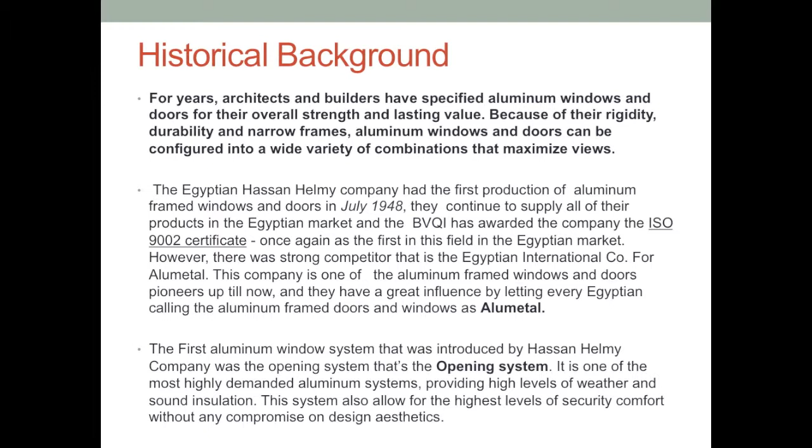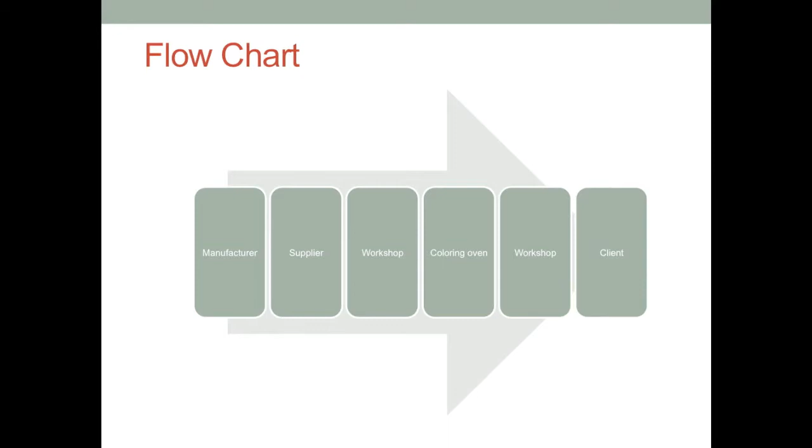Variety of aluminum doors and windows. Hinged and sliding windows or doors. According to the function, dimensions, and space availability, the choice of having a hinged or sliding door or window is based. There are different types of aluminum bars that form the frames that compose the doors and the windows.

In general, the thickness of cross-section affects only the weight and strength and consequently the price. As the thickness increases, the frame is heavier, stronger, and more expensive. However, all different cross-sections can be used in different purposes, residential or office work.

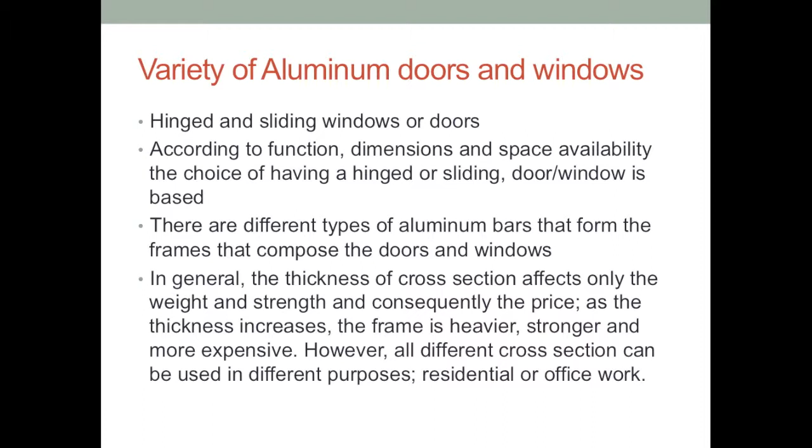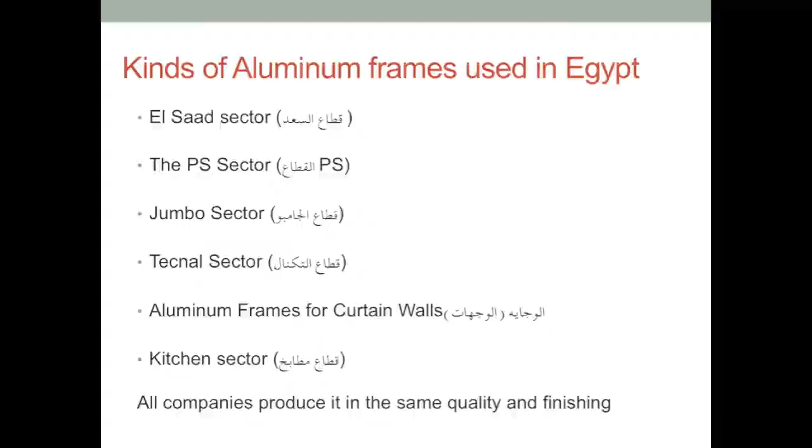Kinds of aluminum frames used in Egypt. El-Saad sector, the PS sector, Jumbo sector, Tecnal sector, aluminum frames for curtain walls, and kitchen sector. All companies produce it in the same quality and finishing. Here's a table that shows the comparison of the different types.

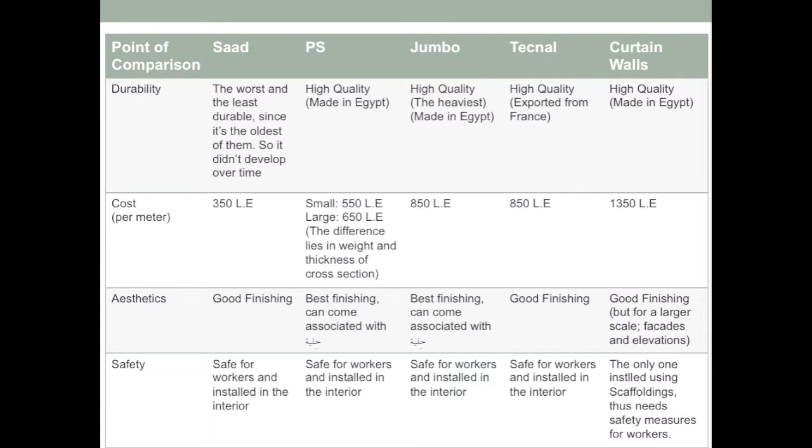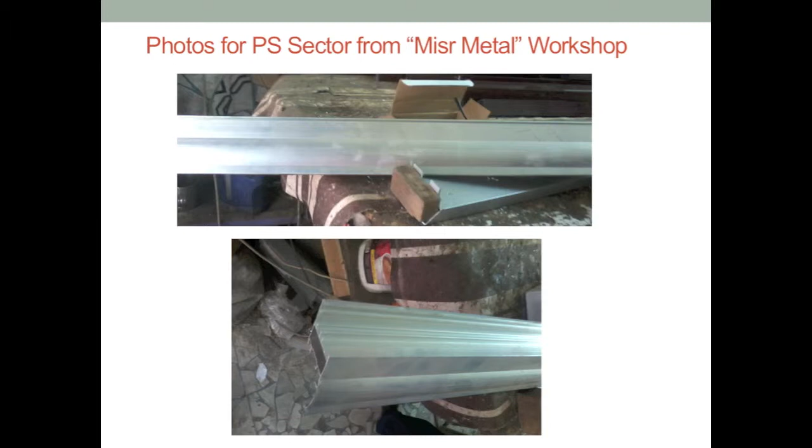Photos for PS sector from Misr Metal Workshop. Photos for PS sector from Farid Workshop in Saqr Qoreish. Photos from Misr Metal Workshop in Dar El-Salam.

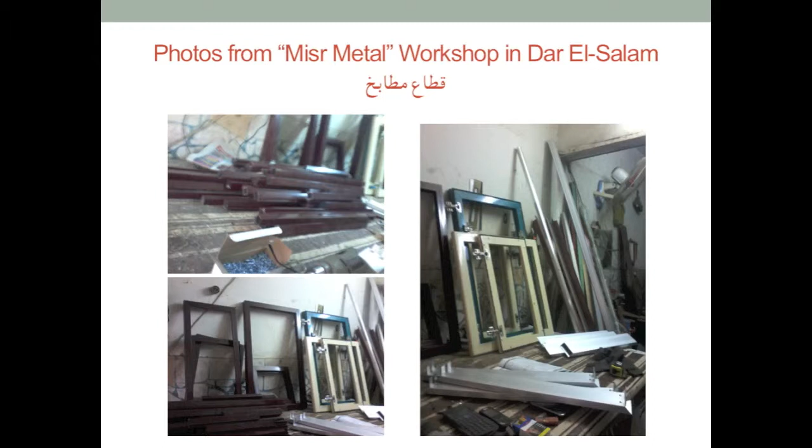The workshop stage. The workshop orders 6 to 6.5 meter bars of the cross-section they need from the supplier. They receive the aluminum silver in color and they send it to an oven to color it to the client's desires.

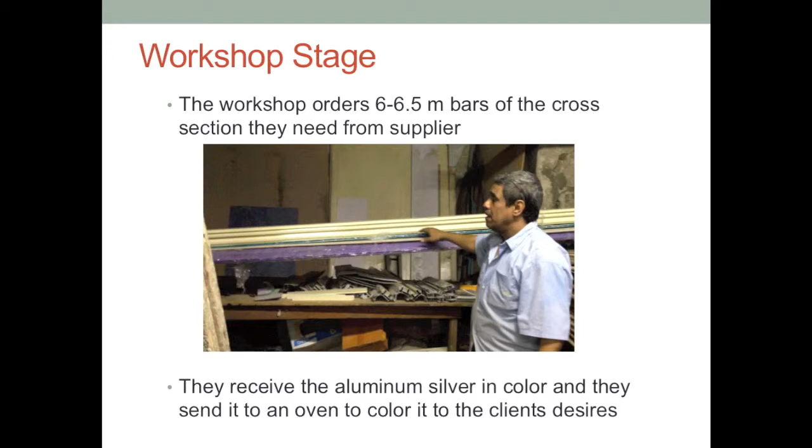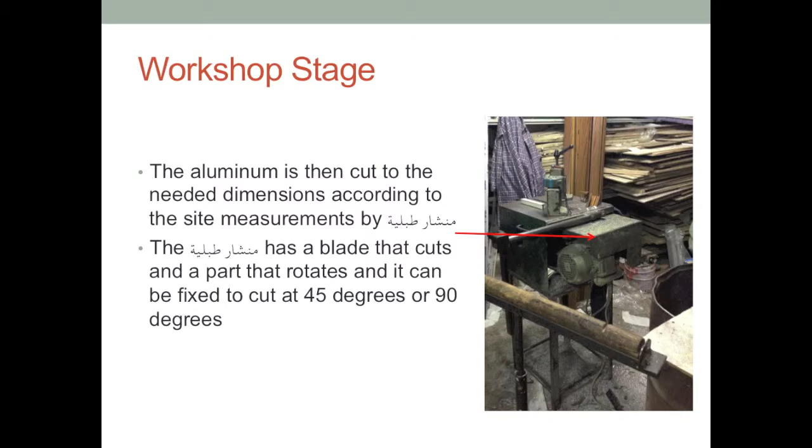The aluminum is then cut to the needed dimensions according to the site measurements by the Munshar Tableya. The Munshar Tableya has a blade that cuts and a part that rotates, and it can be fixed to cut a 45-degree angle or 90-degree angle. Here's a video that shows 45 and 90 degrees cuts by the Munshar Tableya.

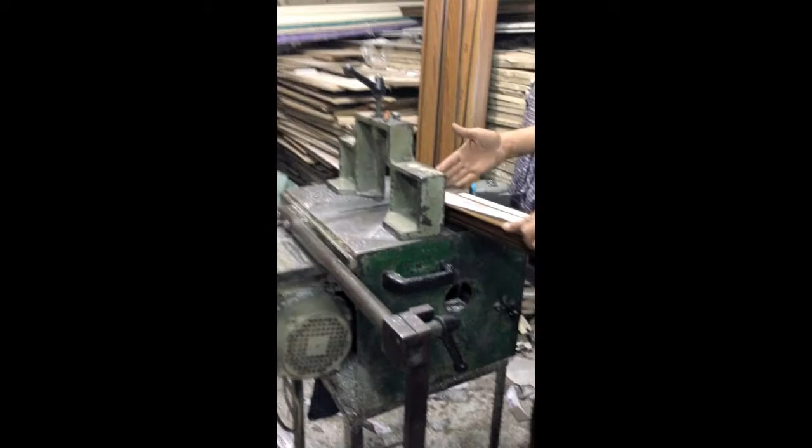Here's a video showing the cutting process.

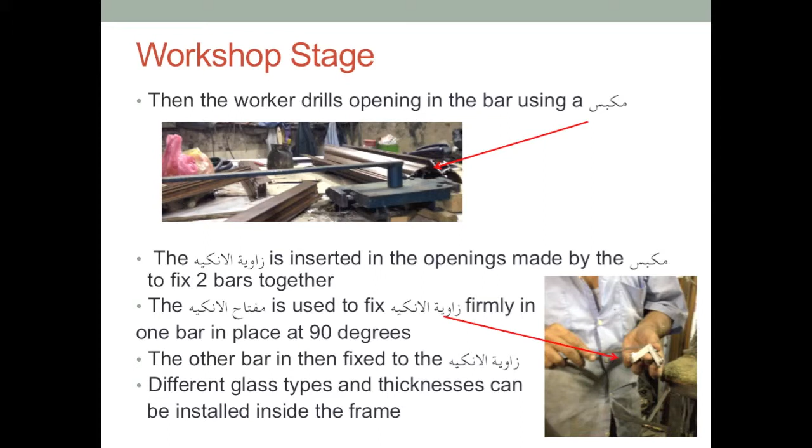Different glass types and thicknesses can be installed inside the frame. Here's a video showing the process of fixing two bars together using zawiya alanke.

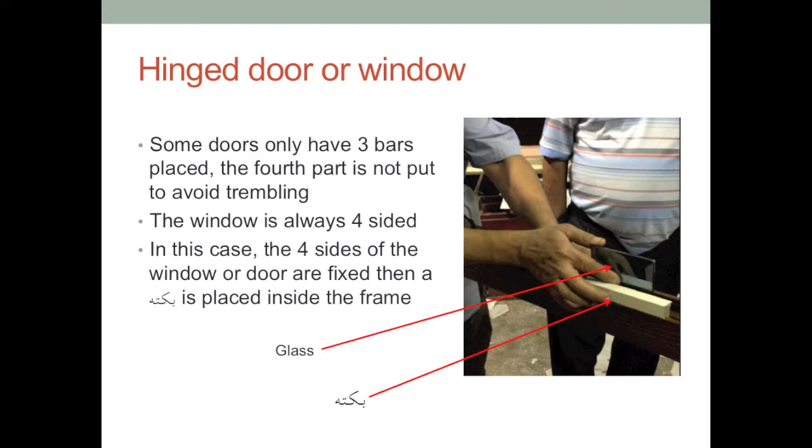An anti-dust and sound band is placed inside the frame. Then the glass is put inside and a rubber band is used to fix it in place. A zawiyat al-sag is placed in the 4 corners of the window or door to hold every 2 bars together and to prevent them from moving apart and strengthening the frame.

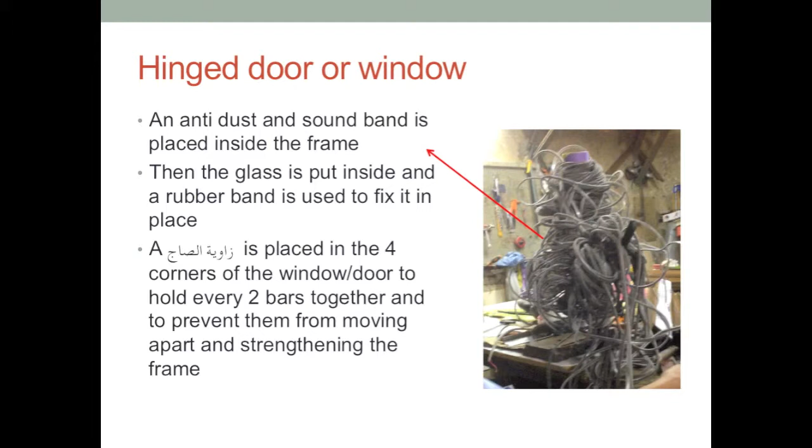Sliding door or window. The initial process is the same as the hinged. When making the frame, only 3 are fixed, creating a U shape. Then the glass is placed inside and the 4th bar is then put. An anti-dust and sound band is inserted. The glass is fixed using a rubber band.

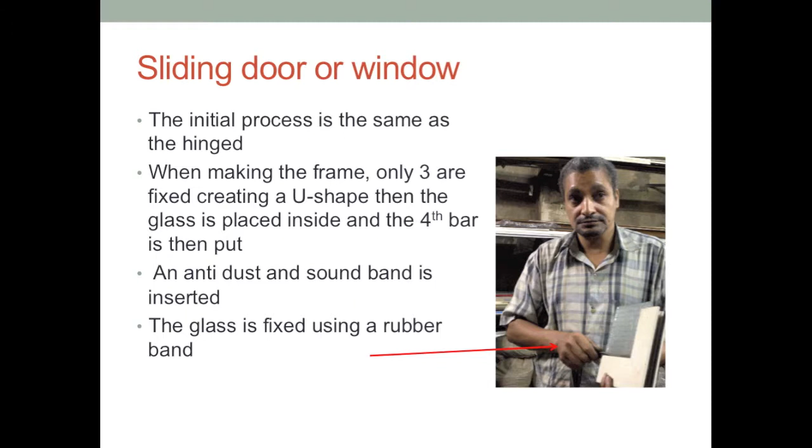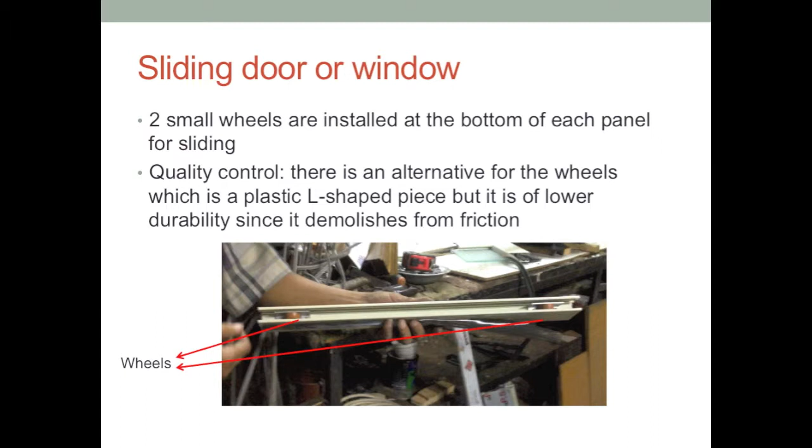2 small wheels are installed at the bottom of each panel for sliding. Quality control: there is an alternative for the wheels, which is a plastic L-shaped piece, but it is of lower durability since it demolishes from friction. This is a video showing the wheel installation.

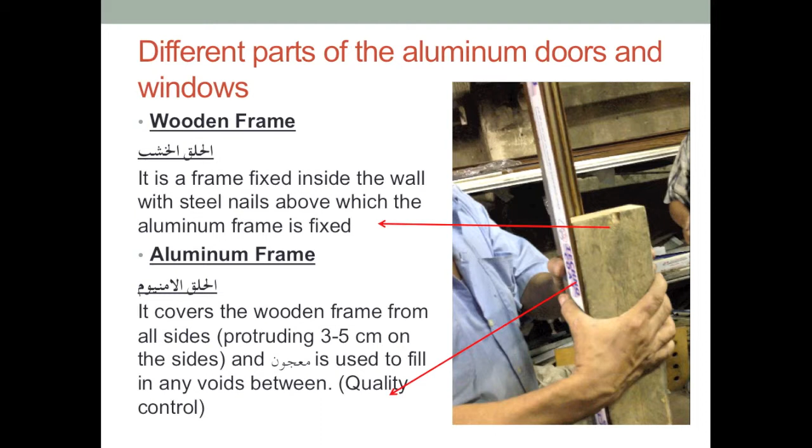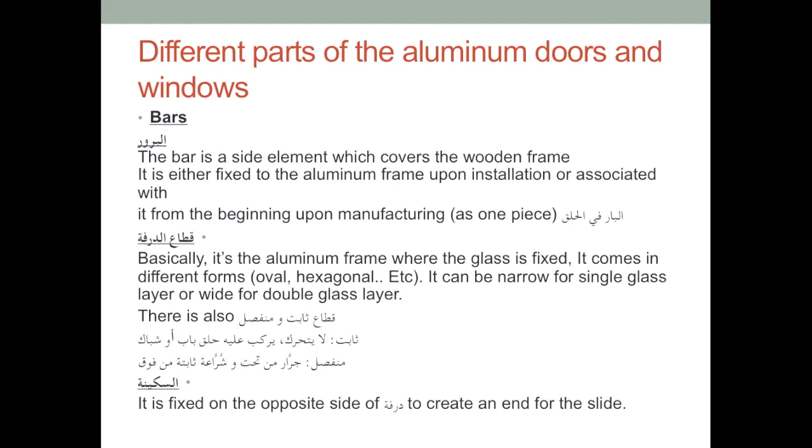السكينة: it is fixed on the opposite side of the درفة to create an end for the slide. Pictures from catalogs of الشركة الدولية showing aluminum frames and bars of different dimensions and cross sections.

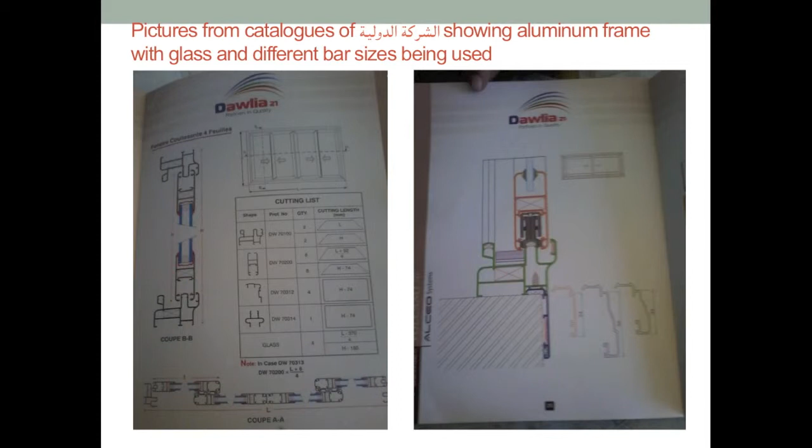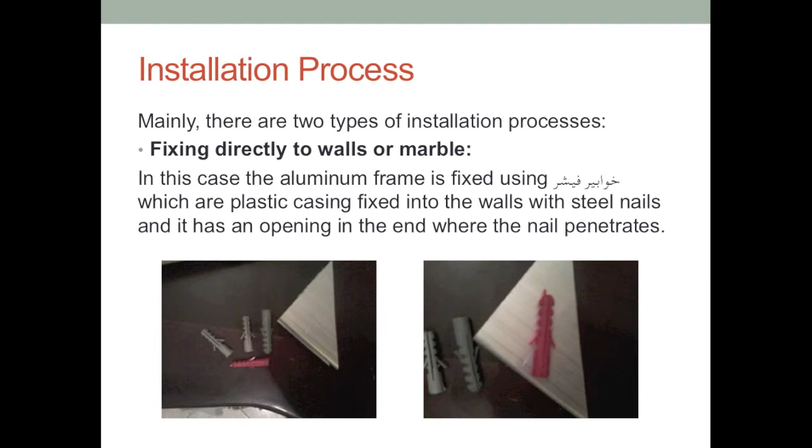Installation process. Mainly there are two types of installation processes. One, fixing directly to walls or marble. In this case, the aluminum frame is fixed using خوابير Fisher, which are plastic casing fixed into the walls with steel nails, and it has an opening in the end where the nail penetrates. Second, fixing on حلق خشب, and this is done by drilling مسامير بورمة.